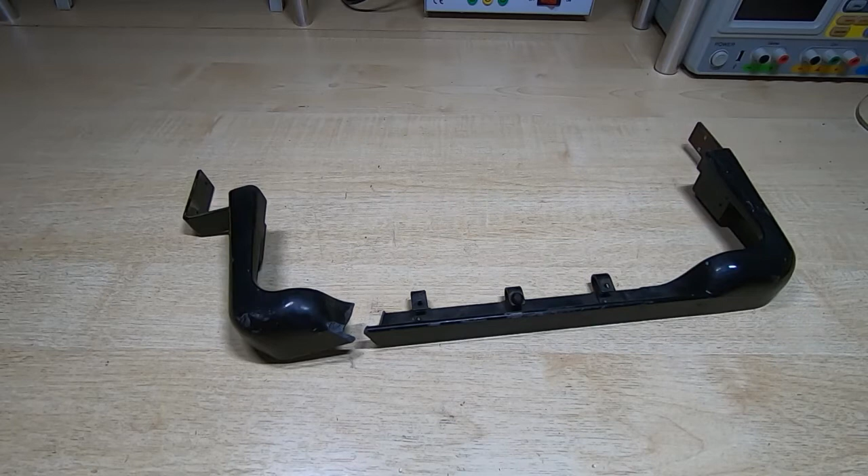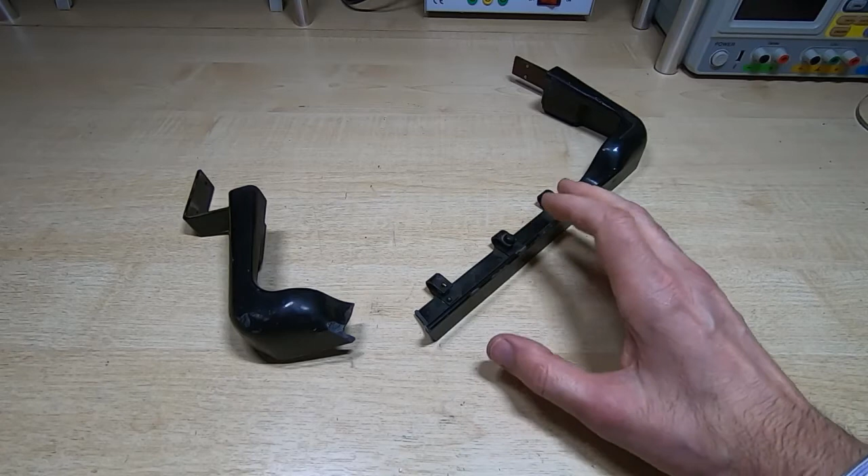This is a follow-up to a video I posted a few days ago where I explained I'd use something like TIG welding to repair an item like this. That video wasn't really about repairing this particular component, it was about using TIG welding as a method for repairing cast aluminium parts. I got a comment I thought was quite interesting, so I wanted to address it. I'd said TIG welding was a very good technique, and in my opinion really the only technique for doing this, and the comment introduced something I wasn't really discussing, but made me realise I hadn't really explained why I'd recommend TIG welding as the best approach.

I did say there are other methods, I just didn't say what they could be. In my opinion, TIG welding is by far the best option for a repair like this. In this video I want to clarify that, and also respond to the comment, because it was interesting. One issue is if you've got something like this to repair and you don't have a TIG welder, or don't know how to TIG weld, then TIG welding obviously isn't an option for you, so you need other ways. However, if you want something as strong as the original, TIG welding is probably the only way you're going to achieve that.

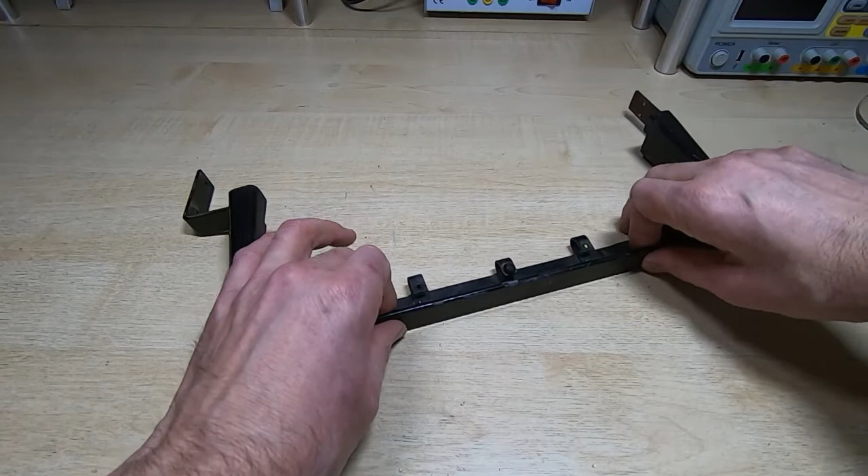This particular part is a good example of why I'd only consider TIG welding something like this. It's right at the front of the machine. When the machine's in use, this is raised and you're resting your hands on it. The machine's picked up using this very heavy part, so a lot of stress goes through this point, which is why it's broken in the first place. Also, it's a bit of a weird shape where it joins quite thin material - cast aluminium, very old, basically pot metal. It's literally mostly air, there's very little actual metal in this.

In the previous video I said I'd use TIG welding, but someone in the comments said the method they'd use is very different. If we go over the other method, it might help clarify why I was recommending going to all the time and trouble of learning to TIG weld if you don't already know how. At this point I'd say, if you decide you'd like to learn to TIG weld, it's not an easy, cheap or quick thing to learn.

You're looking at probably several thousand pounds even to get into it in a fairly basic way. You're going to need a welder for a start - it has to be an AC welder to do aluminium, and with the features you'll need, the welder alone, even a cheap one, is going to cost over £1000. You'll also need other equipment, a welding helmet, and argon gas. When you're TIG welding like this, you use pure argon, which is about £100 a tank for a relatively small tank.

Then you've got consumables - filler rods, tungstens, that sort of thing. Not horrendously expensive, but early on you'll burn through a lot of tungstens and filler rod on pieces of scrap metal you practice on, so it does get expensive. Once you get into it, a tungsten lasts much longer - they're only maybe £4 or £5 each, but you might get through 20 a week when you first start learning. The tungsten in my size 17 torch has been in there for probably 100 hours of welding, so they last a long time once you get the hang of it and stop destroying them.

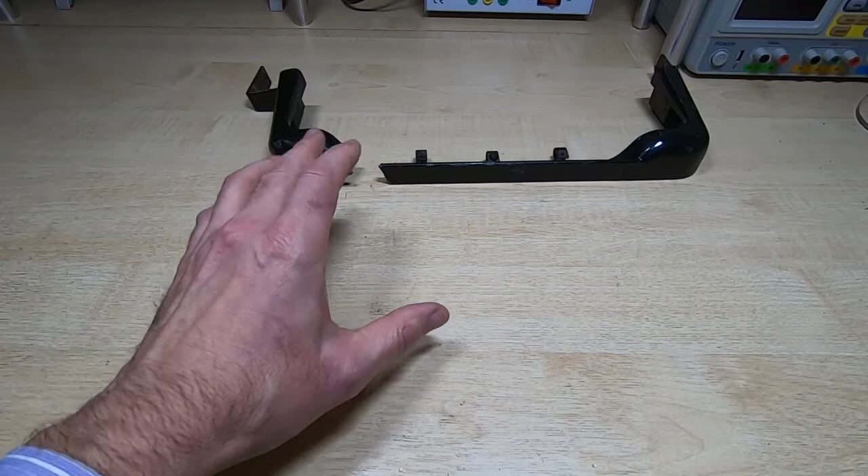The point of this video is why I would recommend learning to TIG weld to repair something like this. I'm going to start by going over what the comment suggested as an alternative, and it is a viable alternative if you've got no other way to do this. It's not something I would do. It's almost certainly going to result in a failure, but it's probably worth having a go at it if you've got no other option.

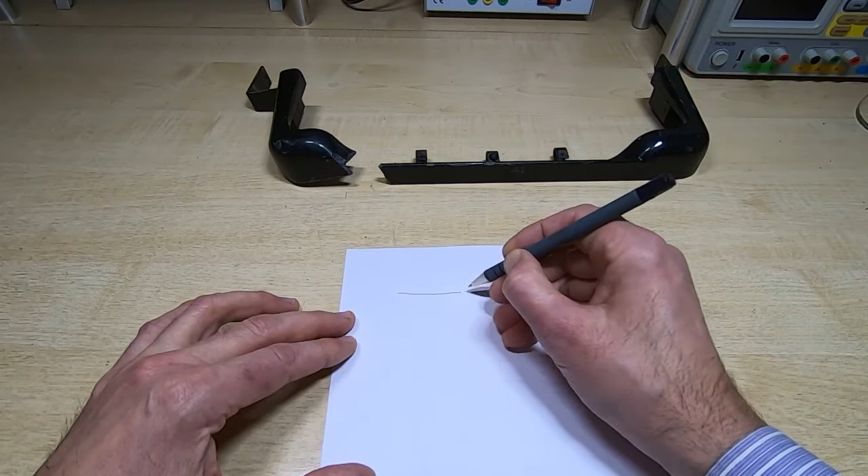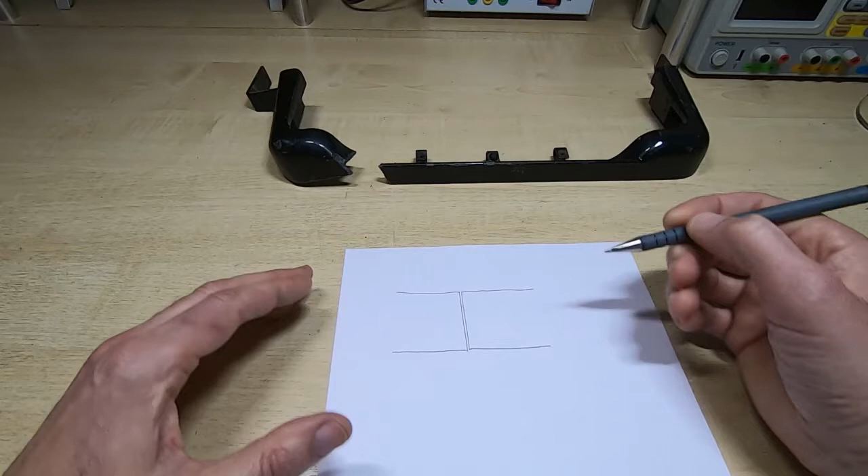Now I'm going to simplify the idea here, but what the commenter was suggesting was if you have the two pieces, I'm going to simplify the break here, which again is not a simple break, it's a compound break. It goes in various directions and it's not on a flat piece of material. It's kind of T-shaped with a curve, which makes it even more complex to repair.

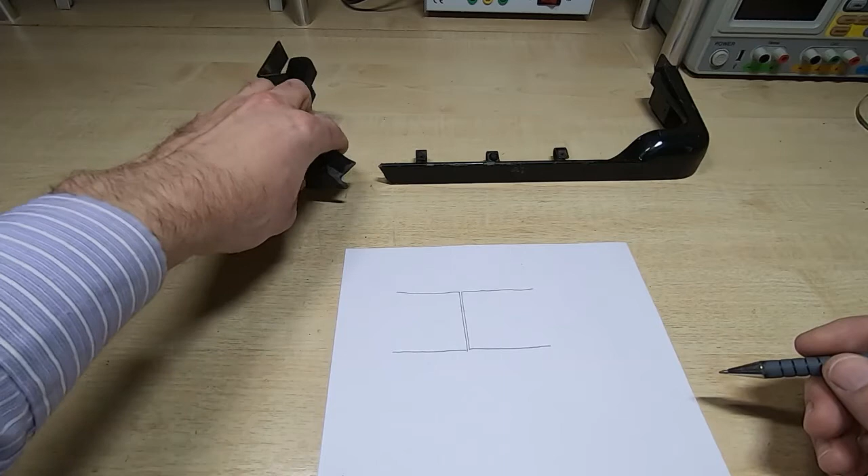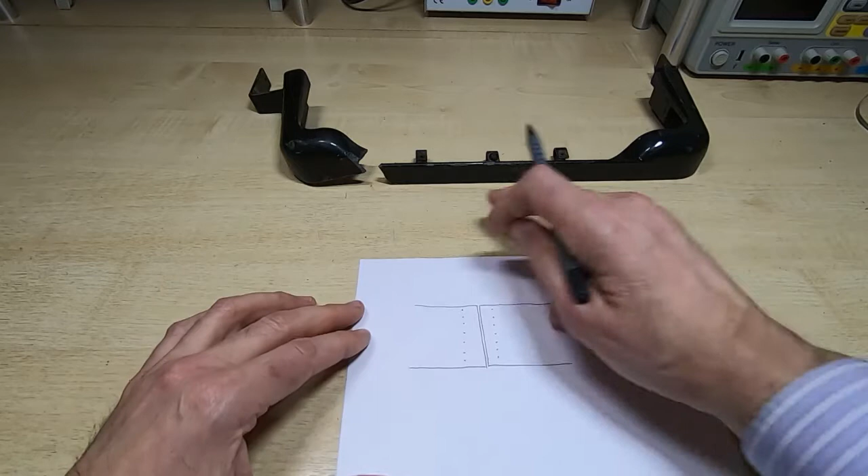What he was suggesting was drilling a series of small holes, hopefully you can see what I'm drawing here on both parts, and then machining out. Obviously it has to look right, so this side needs to look the same as this side. This is a visible part of the machine, and even if it wasn't visible, as I've said on previous repairs, I'm restoring irreplaceable equipment here, so I need the repairs to look right as well as being successful and strong.

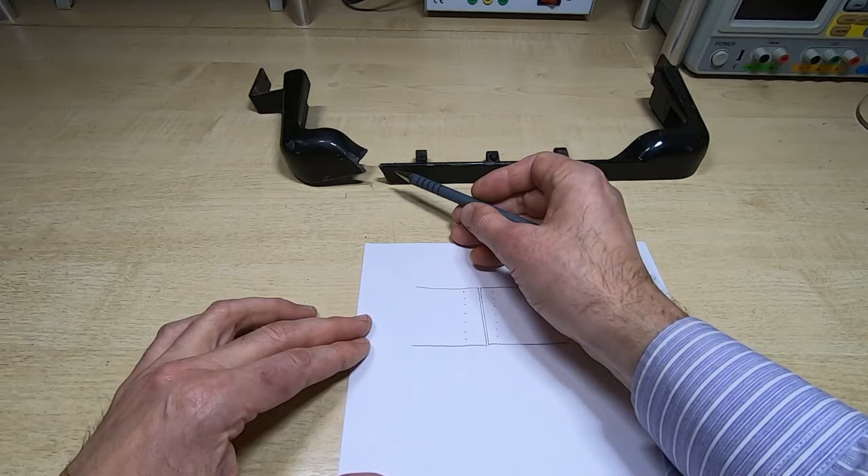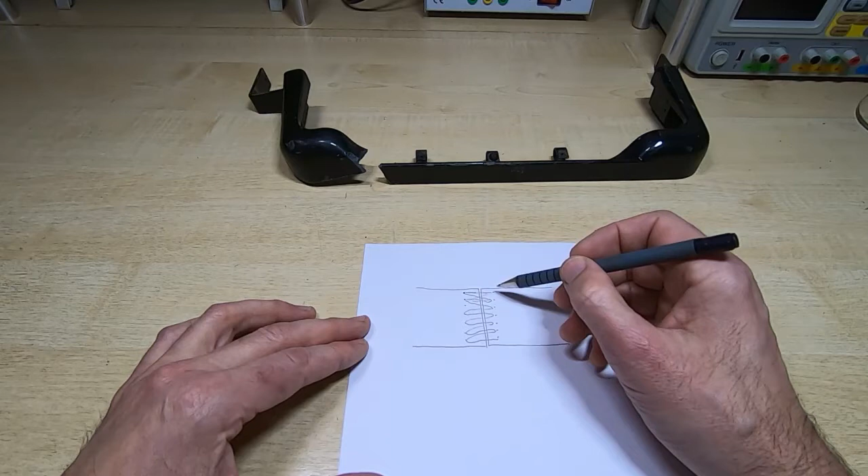So what he suggested was drilling a series of very small holes, then basically machining out channels, and then weaving carbon fibre back and forth across the joints, kind of like stitching it, and then impregnating the carbon fibre with some kind of strong adhesive. Now that will kind of hold it together, but I can guarantee this is going to fail after a fairly short amount of time.

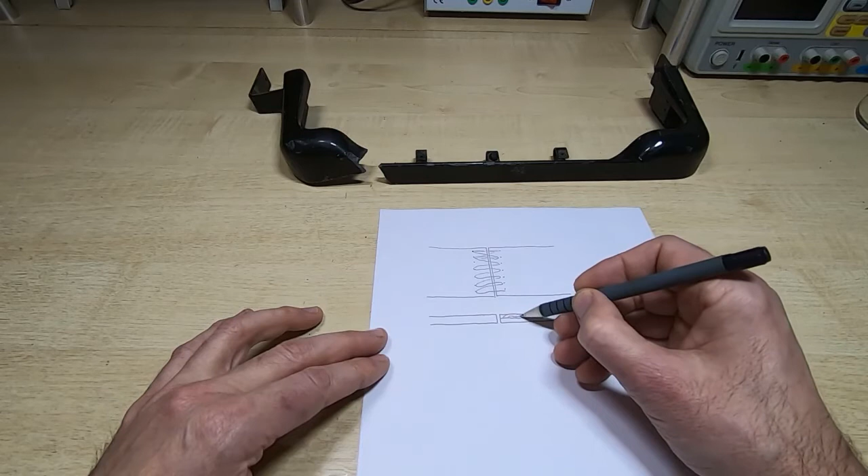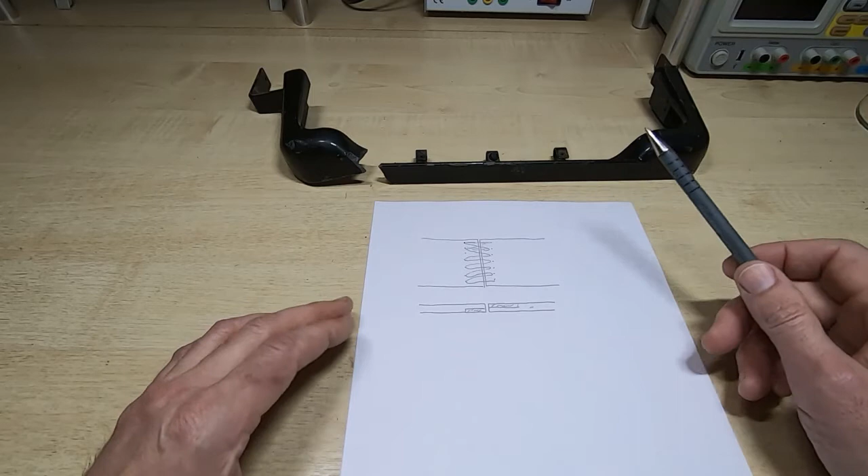Remember that this material is only about 2 millimeters thick, so looking side on, even if you only recess each side by 1 millimeter, you're going to take away half the material from one side. Even if you alternate it side to side, this, as I said, is pot metal. Don't confuse this with machined billet parts you might get on a more modern piece of equipment. This is basically air held together with very thin bits of poor aluminium and lots of other impurities. It's a very poor material, very weak to start with. It's really the shape that gives it its strength.

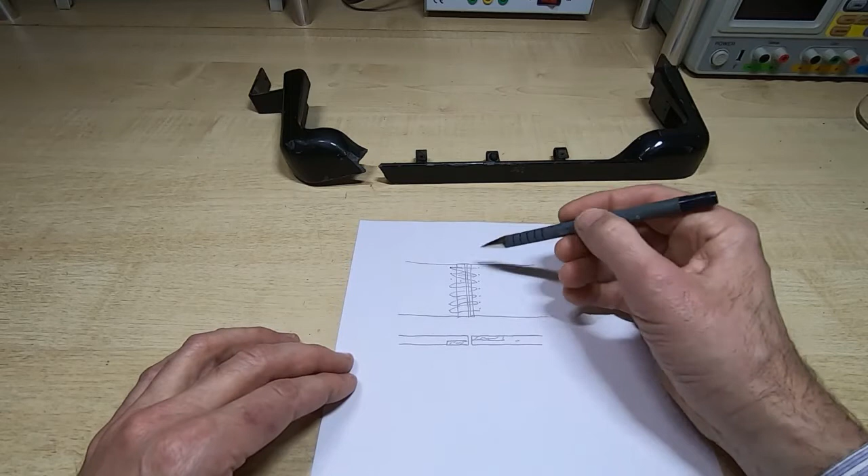It's also very brittle. So the problem you're going to get is you've created a series of weak spots, and it doesn't matter how strong this carbon fibre is. Even if you imagine putting a solid piece of 2-inch thick steel here and bolting it through, it doesn't make any difference. The ultimate strength of this join is where the holes are, and you've created stress concentration points. So what will happen, I can pretty much guarantee, is it's going to break across the holes. The first time any real stress is put on this, it's just going to break off.

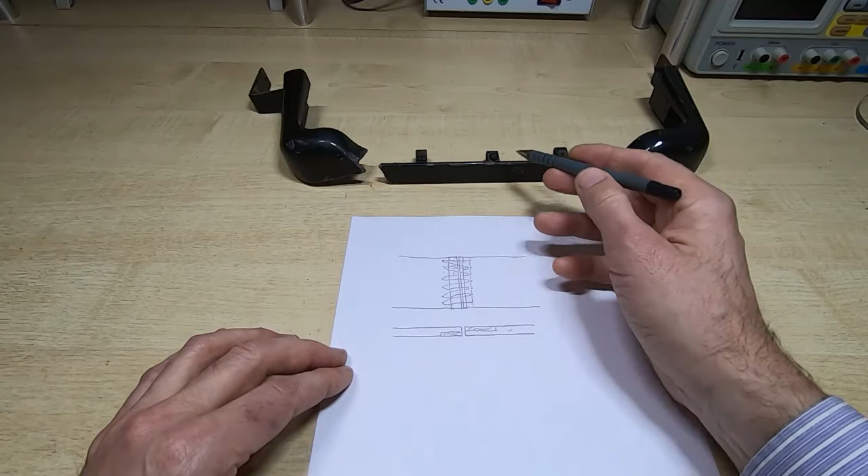And even if it doesn't break off the first time, you're going to get cracks developing. This pot metal is extremely susceptible to cracking, and you just get cracks forming here, and within a very short time this whole thing will fail. Then this entire chunk will drop out, and you end up with a much bigger problem to try and solve than you started with.

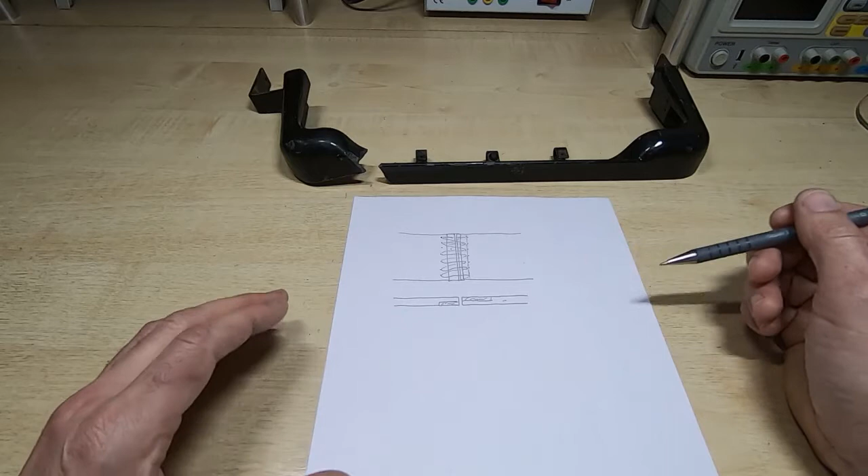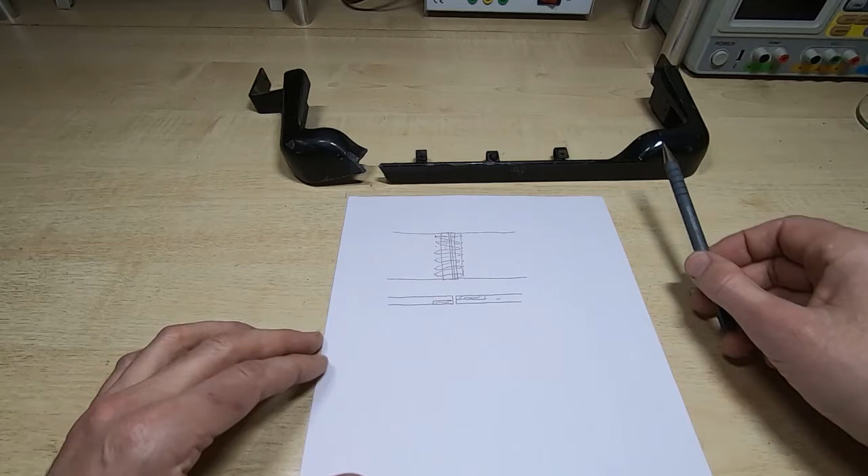So although that method might work in some instances, and it's probably a viable method, it's not one I would ever use, and certainly not for something like this. Give it a go if it's the only option you have, but I wouldn't hold out much hope for long-term success on this. There are other steps in repairing this that I'll go into when I post the videos on the repair and restoration of this.

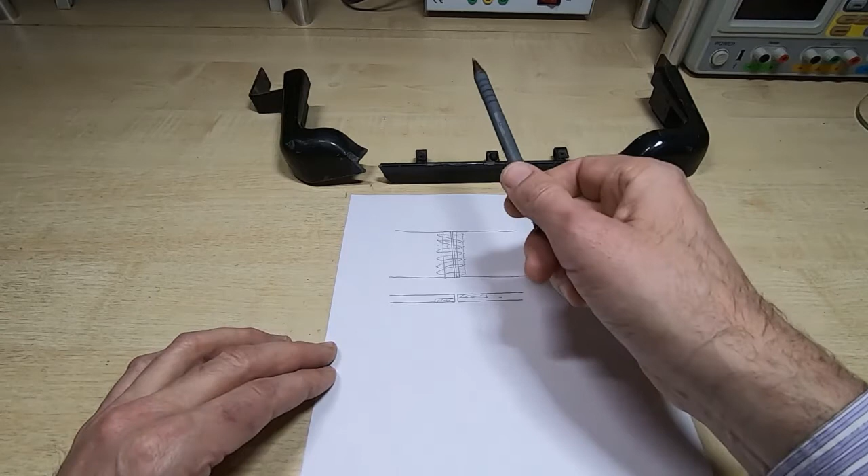There are other steps required that totally preclude this as a method. The reason I'm saying it's a straw man argument is because I wasn't really talking about repairing this particular piece of the machine. There are other steps I will come to, and you'll see why this is not a viable method.

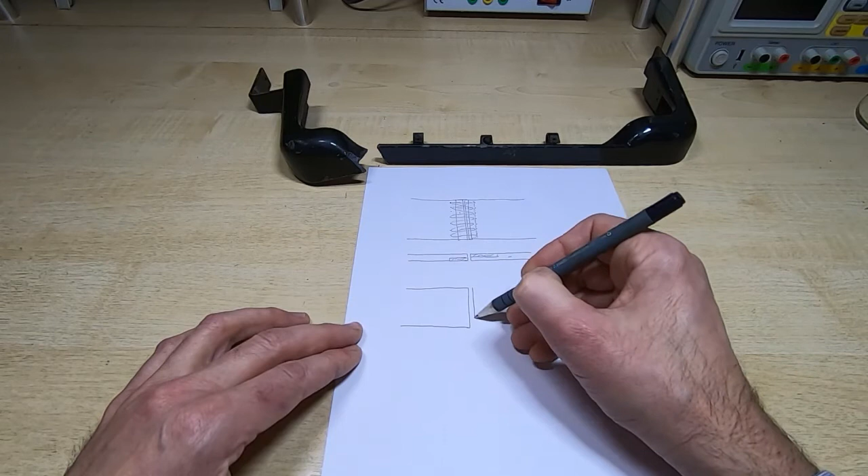But if we now look into why I recommend welding as the best solution: if we take the same starting point, we have two pieces of material we want to join together, and what we really want is to end up with a single piece of material, not just a finite number of stress points. It doesn't matter how strong the carbon fibre is here, that's not where it's likely to fail - it's almost certainly going to fail where the holes have been drilled.

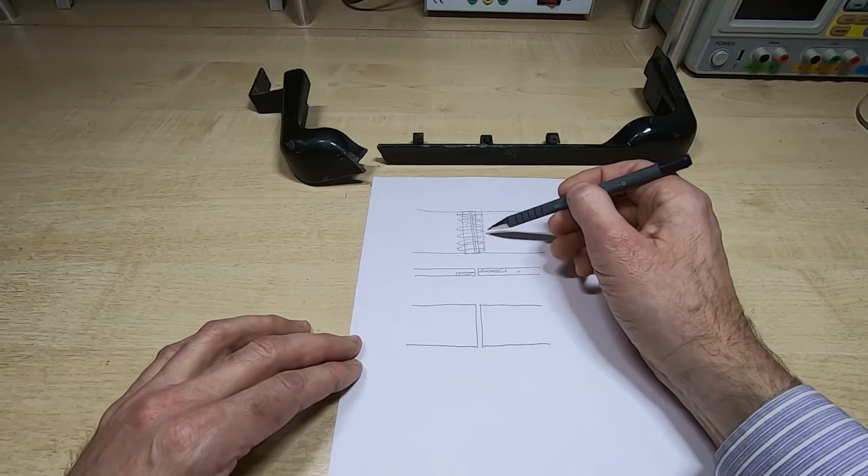Even if you stagger them, you're going to need quite a few to give you strength across the join, so they'll be fairly close together. It's quite a thin cross-section material, it's pot metal, it's going to fail. There's no ifs or buts about that - it's almost certainly going to fail fairly quickly.

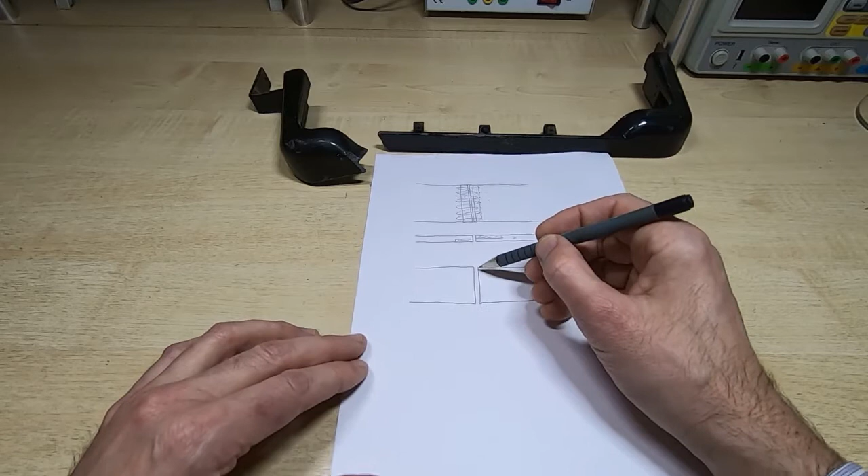Whereas welding is kind of the same thing, but on a much smaller scale. So if we look at the way I recommended welding this and the way I said I would do this - we have the two parts we want to join together. It's not quite as simple a shape as this, but the principle is the same. If we look side on, what I would do is start by grinding out.

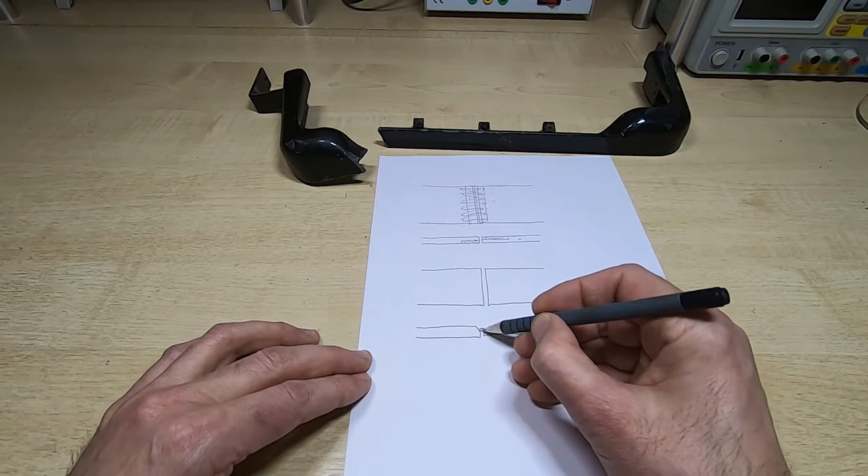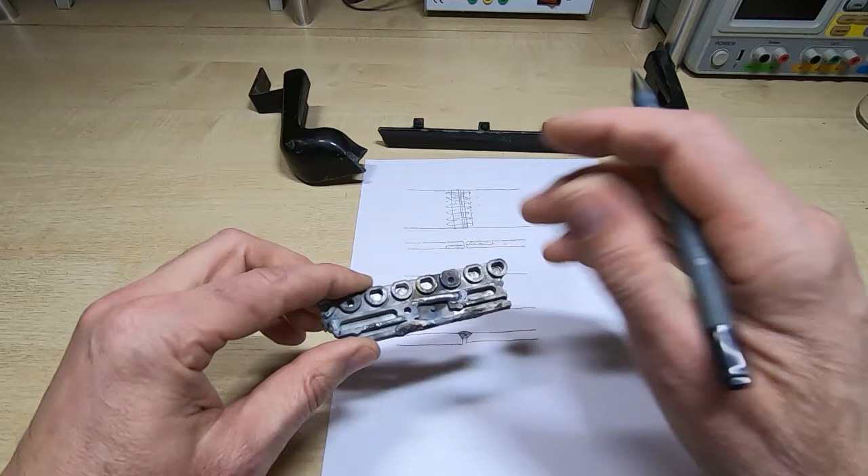I'd clamp it all in place and grind out some material along the join. Then we completely fill that join with weld material. It would end up proud, but would end up with what amounts to a solid fill. The important thing here, which I'll show you again, is this penetration into the base material.

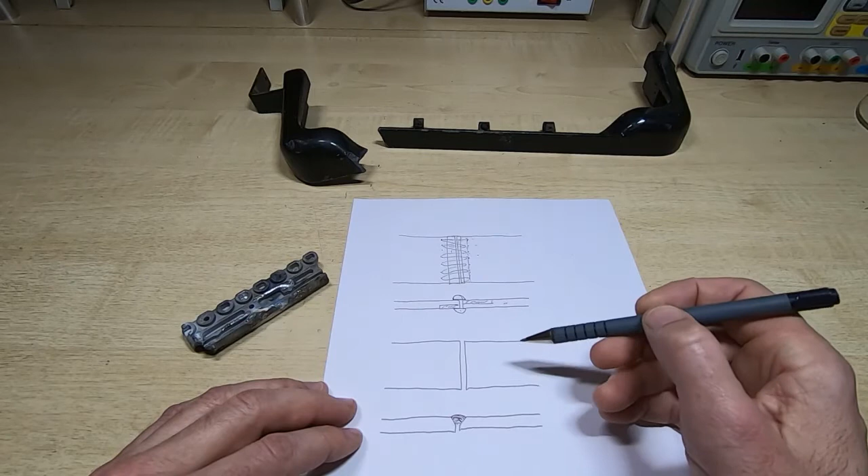So what we're not doing is simply sticking a weld on top of the gap - if you're not familiar with welding, this is not what you're aiming for. You're not aiming to put a join on top and a join on the bottom. What you're aiming to do is completely replace the metal where the break was with new material. So we grind away part way through. You can go all the way through if you want and do it that way - I prefer to do it on both sides if you have access to both sides, of course.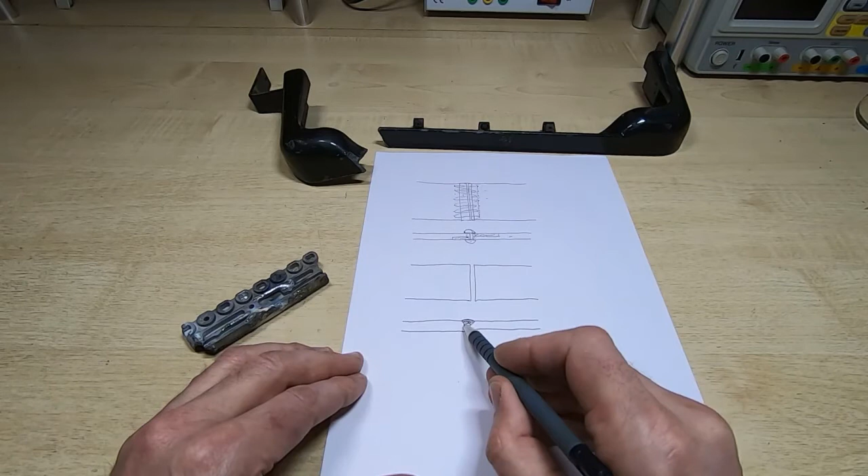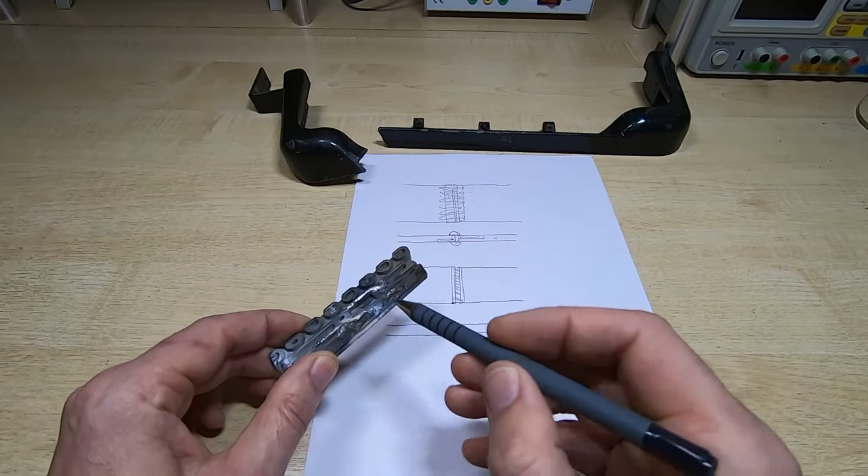You then replace what is then a void, and fill it with filler material, and that will go all along the join. So this entire space is now new material on one side. Hopefully in these areas you've got the new filler to penetrate into the base metal, which we'll look at in a few minutes.

You then flip this over and do the same thing from the bottom - grind away these corners and then fill in the void you've now created. What you end up with is a completely filled void.

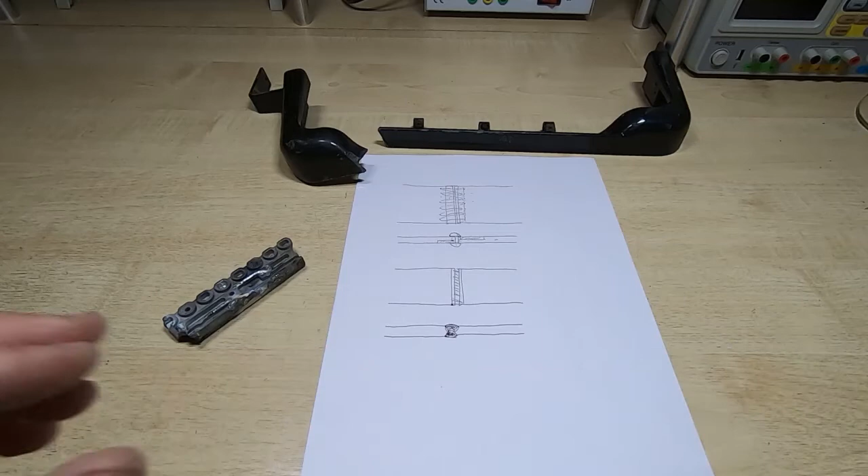I'm just going to zoom you in so you can see that a bit more clearly. So what we've done is completely replace this area of material - where this gap was is now all completely new material all the way across. We've effectively done almost an infinite number of these cross links.

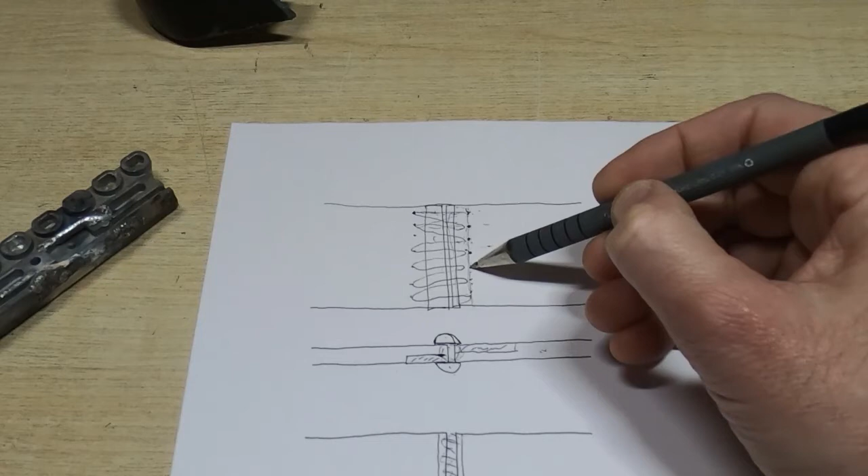The difference is we haven't created single point stress concentrations. What we've tried to do is merge the weld and get it to penetrate quite deep, so it's not just ending where the filler ends - it's merging quite a long way into the base material, and branching out within it.

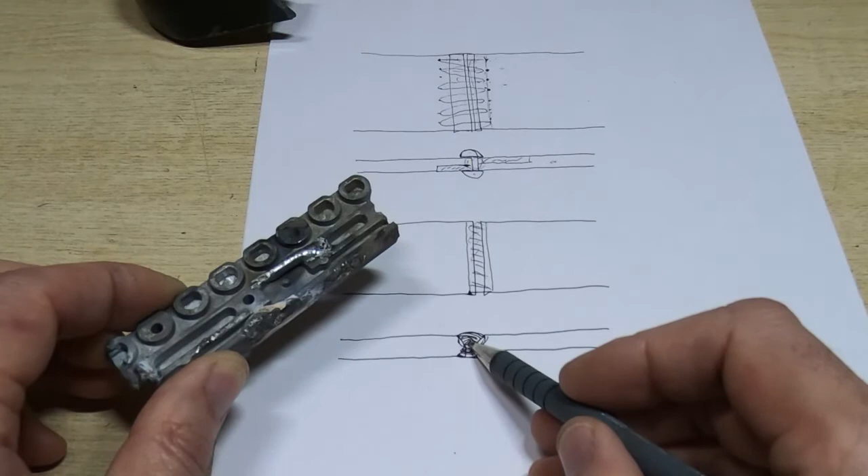We've replaced all the material around the break, so this now, once we've ground it back, is effectively a single piece of material again. It's not two pieces with some scabs that we've popped on top that could drop off or just pull bits of the base metal out. It's an entire repair where we have impregnated the base material with new metal.

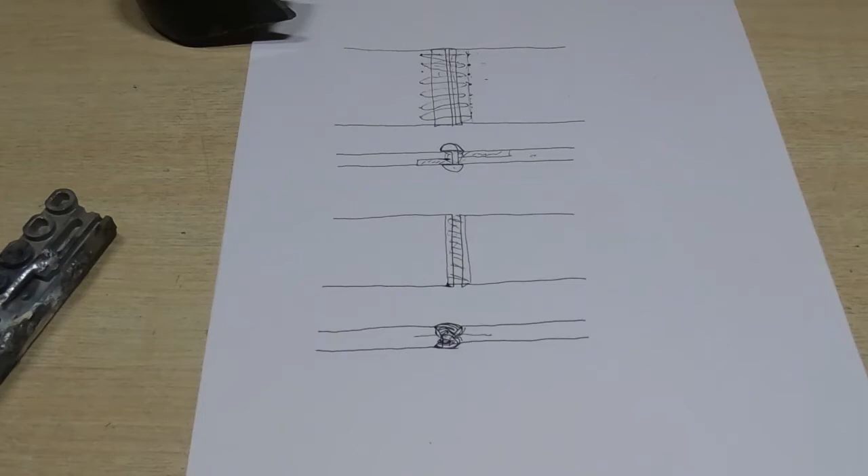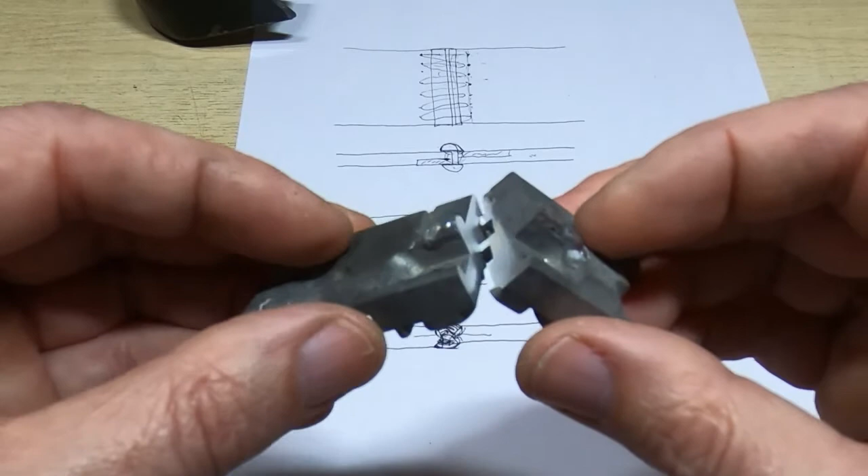Just to clarify exactly what I'm talking about, if you remember, I did two test welds. So this is how the other one looks. I don't know quite how clear this comes across, but I've cut this in half, cut across the weld that I made, and then ground it using a belt sander to hopefully show you a cross section. This was a thin wall, so you can see basically how thick it was at this point.

I don't know if you can see this or not, but the filler material, which is on top here, is a slightly different colour, but it extends well down into the base metal, well beyond where the filler seems to end on the surface. So the filler seems to end about here, but it's extending down to kind of here - nearly twice as deep as it appears to from the outside.

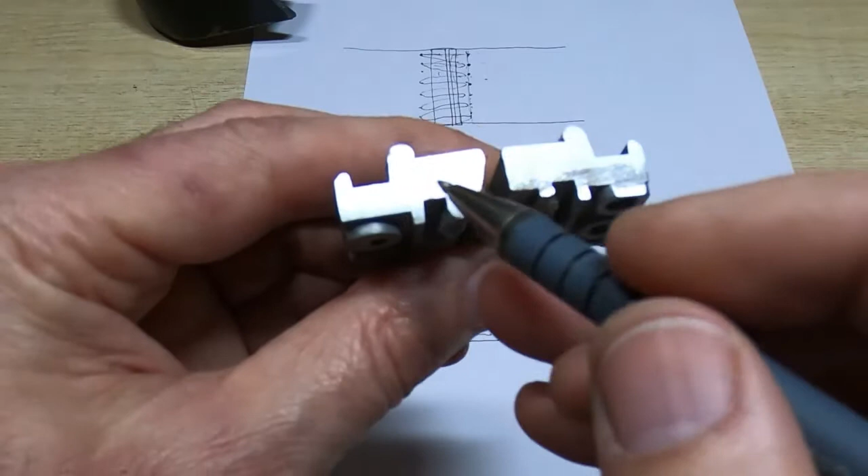There are no voids, so we don't have any gaps, and this is pot metal as well, so it was very dirty - I didn't even bother cleaning it. On both sides we've got full penetration deep down into the material, so this is now effectively one piece of material. You will not be able to break this top piece off. It's now an integral part of the base metal, as strong as it would have been if this was originally part of this component.

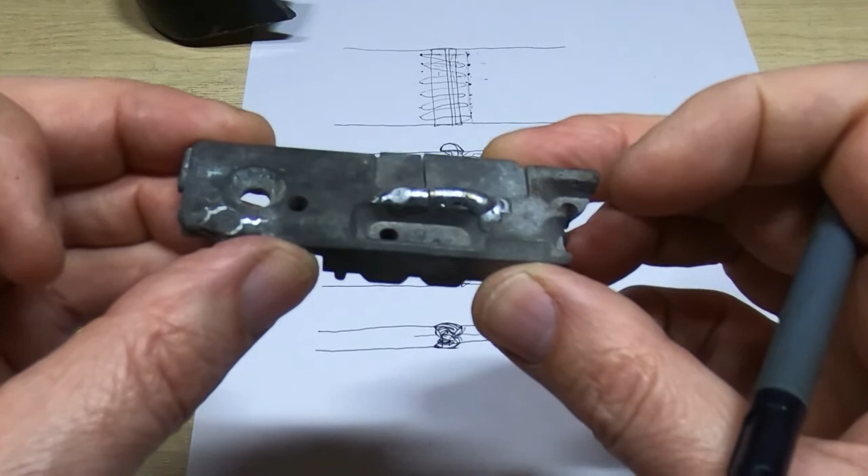And that's what we're aiming for. We're aiming to effectively replace the gap in the metal with solid material all the way through and all the way along the join. We're not creating lots of little stress points here that will all join together and cause a failure.

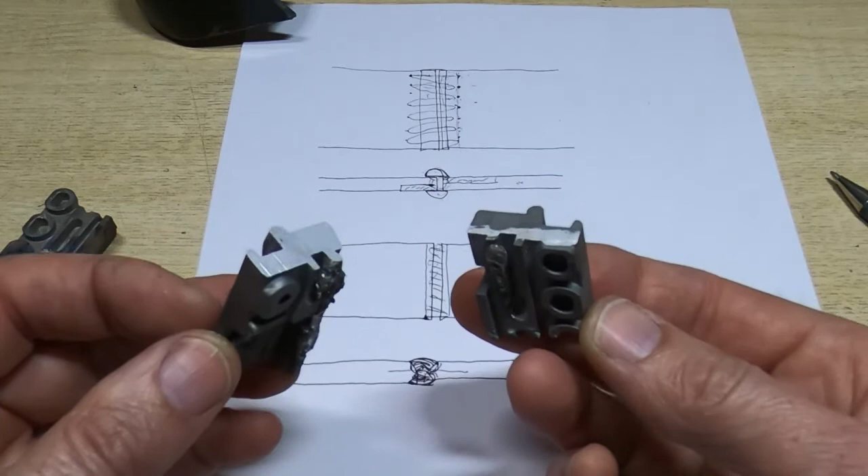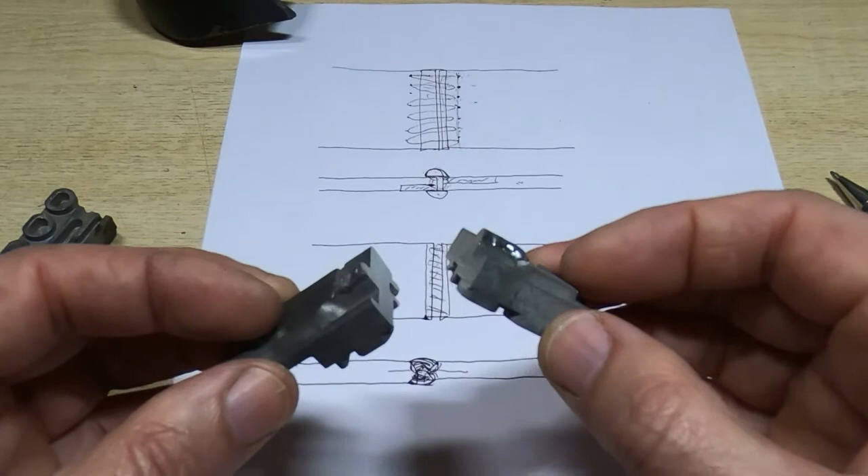And that's why I recommend using a technique like TIG welding, because it gives you first the ability to weld it. It's one of the few welding methods that I'd certainly be able to use for an effective repair like this on this type of material. Again, don't confuse this with billet machined parts - it's very different. It's extremely tricky to weld this. It's dirty, impregnated with oil and dirt and all sorts of stuff it's picked up over the years.

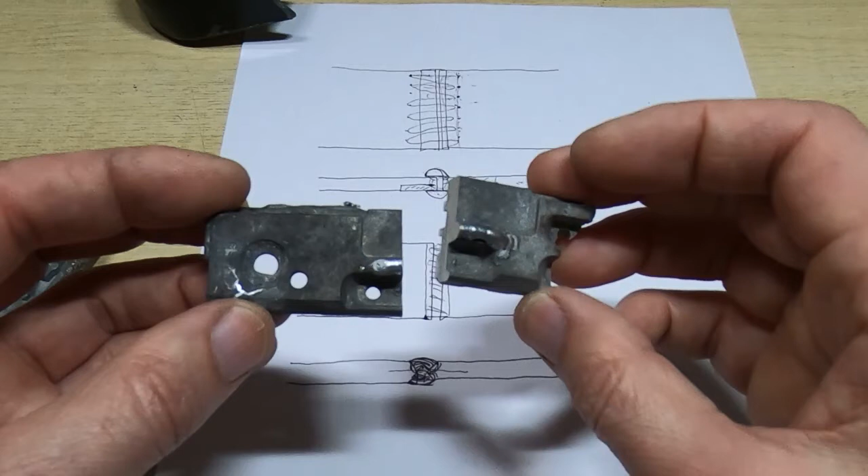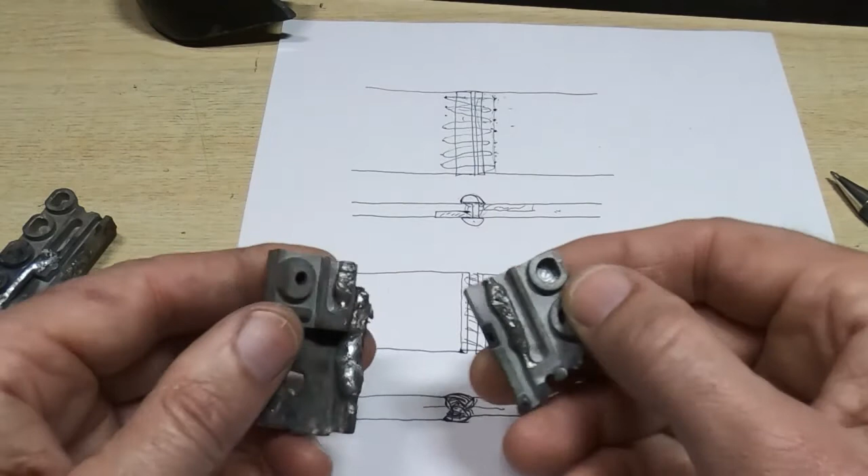Again, another reason why glue doesn't really work, but there's also other reasons why this method is not suitable for this. I will come back to that in the videos when I repair this actual component, because there are other steps involved that would cause this to fail. But hopefully that's gone some way to explain why I prefer to use a technique like TIG welding to make repairs like this. It gives you an absolute repair.

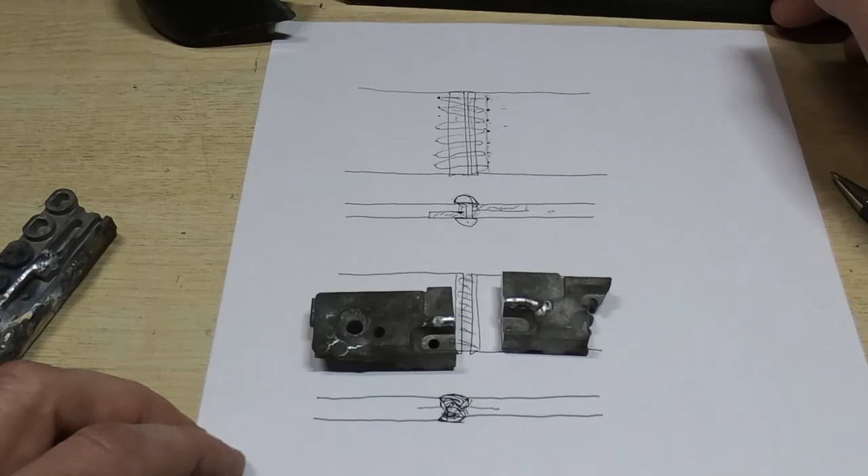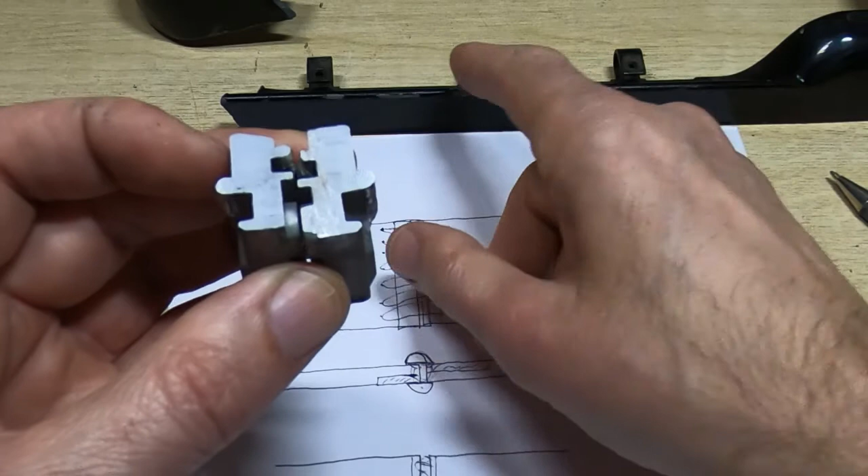It's not going to fail unless the same stress is put on that caused the original part to fail, of course. But in theory, if this repair is carried out properly and we apply a stress in the centre of this, I would expect the other end to fail rather than the repair, assuming I've done the repair correctly and got the right amount of penetration, because this new material is a lot stronger than the base material we started with.

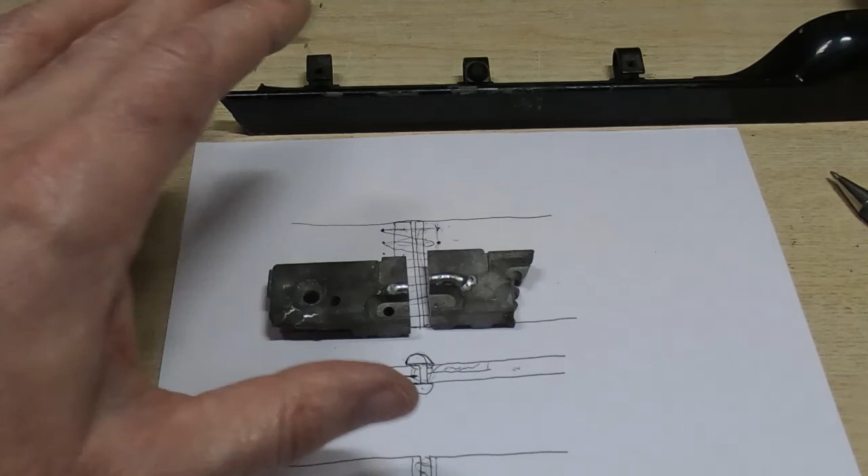Okay, well hopefully that explains why I would recommend considering learning to TIG weld. Not something that should be undertaken lightly, but it is a lot of fun learning to TIG weld anyway, so it's something that in its own right is a fun thing to learn, but certainly for a repair like this is an invaluable tool in your arsenal.